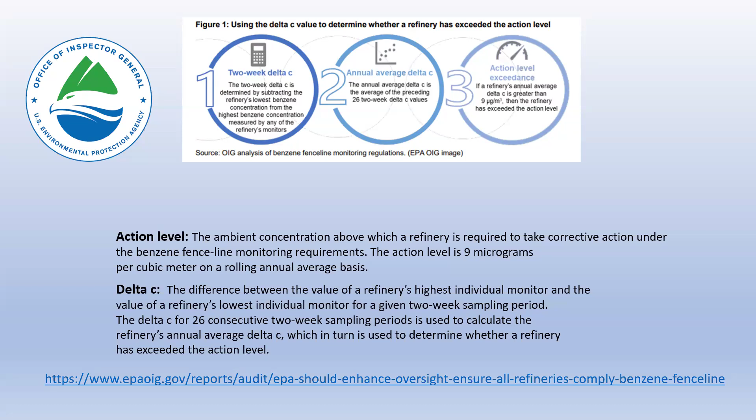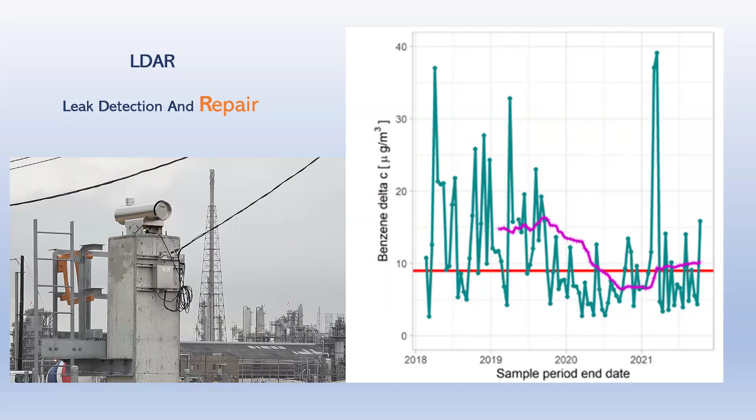So what this graph shows is one single plant that was down below that red line, that 9 microgram level. So they dip below it, but over that 4-year period you can see how things change. They spend a good part of that period way above that line with some big spikes. That's the kind of information the EPA looks at, and the kind of thing that spawns a lot of this action we're seeing.

So why does that boss care so much? Because he's getting pressure too. Like I said, everybody's got a boss.

Back in 1982, just a little background, I live south of Texas Avenue in Texas City. They try to make that a green zone, but there's still some homes back there. So a few blocks away was the Amoco refinery. And at 22 years old, I guess you could say I was in that 54% poverty level. And yeah, it did smell pretty bad.

But I got used to it. I worked offshore, so I got a good dose of clean air all the time. Came back, and after a couple of days couldn't smell anything. But in reality, most of the people on this webinar spend at least 40 hours a week in this kind of environment, in that refinery chemical plant kind of environment. So it's where we work, it's what we do. So each one of us cares, and we should, about emission leaks.

But back to the EPA - remember, they're from the government and they're here to help. The EPA has a free publication to guide you through your LDAR best practices. I was able to read it a couple days ago, and it's very complete. They pretty much lay out the whole model LDAR program.

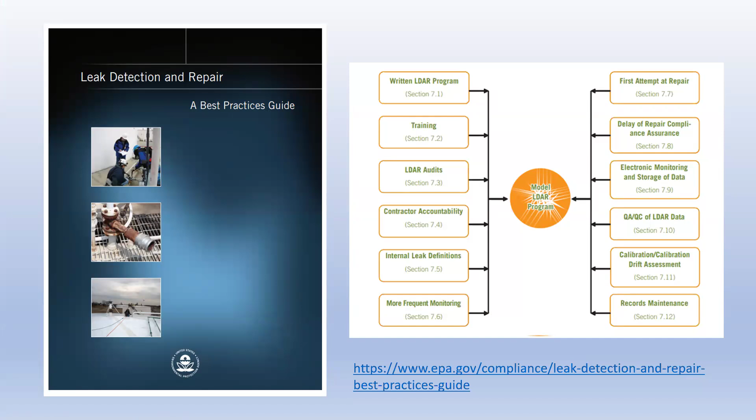And in my world, before the Belzona world, it was a while back, but what we really thought about with emission leaks was a lot of tightening valves and things. It was a lot of fittings, but we're going to see that there's a lot more to that.

And really a common theme with the EPA is time - how much time you have to report, how much time you have to repair. Another common theme is going to be money, so money in the way of fines. You'll see that that's coming too.

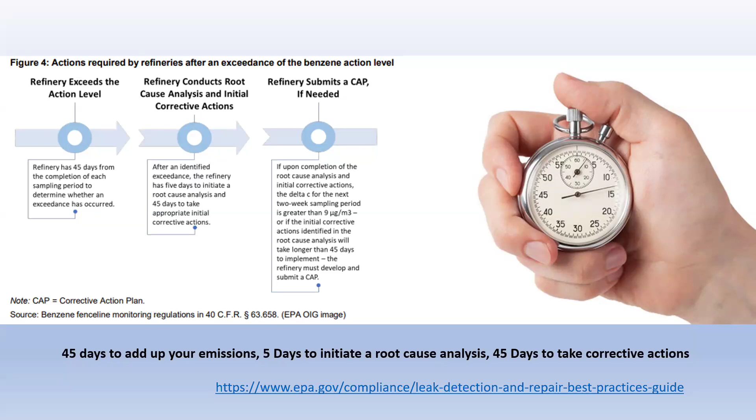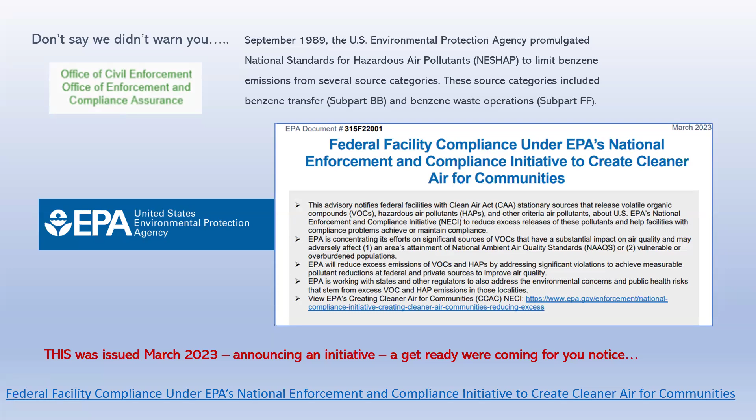So how do you respond when the boss is upset? When you know he's working on that report that makes you look bad, you get out in front of it. So you remind everyone that the law has been on the books for a long time. And then you announce an action enforcement alert.

So basically what you've done is you've shot a round across the bow and told everybody you're on the way. So that's what the enforcement alert looks like. I've seen it on the desks of you EHS guys, so I know it's something everybody's paying attention to.

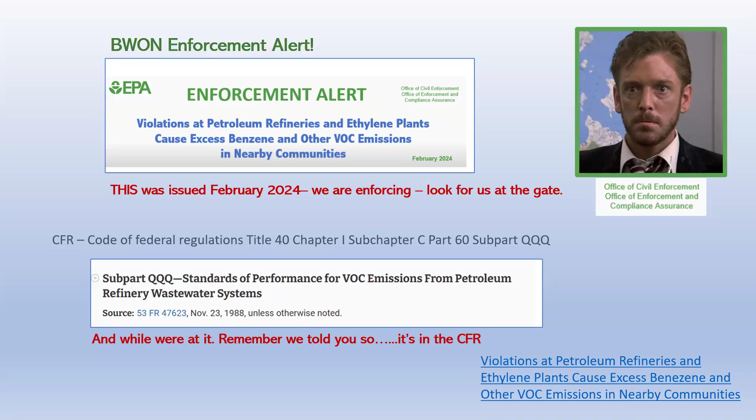Of course, they told you so, because they've had emission standards for refineries and air, and then their wastewater systems going way back to the late 1980s. So they're going to be carrying the CFR 40 in their hands when they show up, saying this has been on the books a long time. We're just here trying to make sure everybody's doing things right. And there's Mr. Peck making sure it's going to happen.

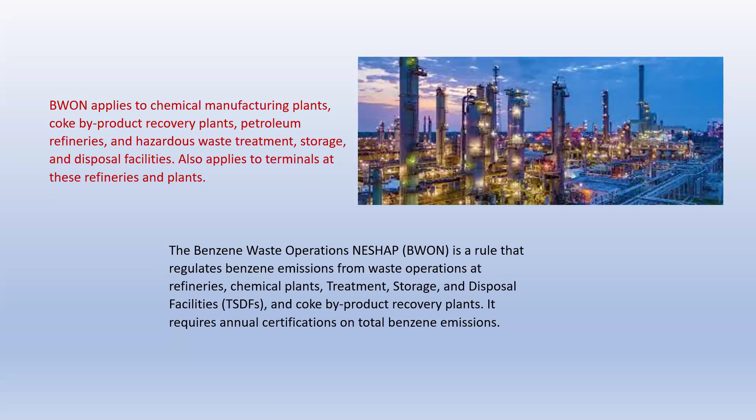So next, what you do is you cast a real wide net. It's not just a refinery. Let's look at the terminals within those refineries as well. Let's get all those tanks, all that flare lines, let's get everything. Then you look at ethylene plants, chemical plants, coke byproduct recovery plants, and then all of the waste treatment facilities that dispose of benzene for all these plants as well. So a nice wide net, a lot of people to talk to, a lot of people to find, if that's the case.

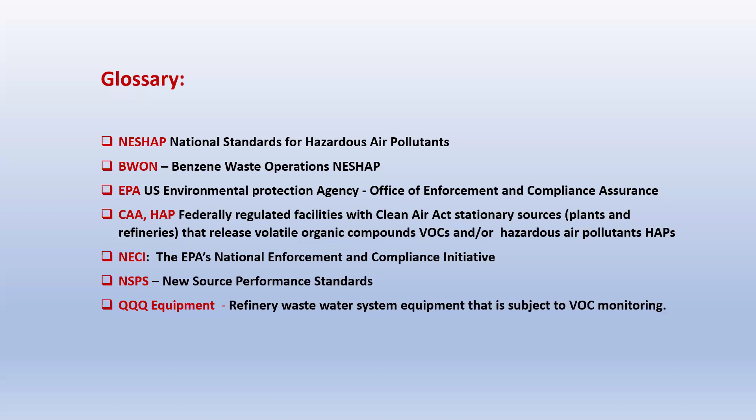So BWON, what is BWON? I put this little glossary together. I think we all know what the EPA is, but BWON is actually Benzene Waste Operations NESHAP, or NESHAP, which is National Standards for Hazardous Air Pollutants. So if people ask you what that is, it's BWON - I just say benzene waste management. And QQQ equipment, I threw that down there at the bottom, because refinery wastewater systems equipment is subject to VOC monitoring, and that is considered QQQ equipment. So those are all things you might hear when somebody's looking at emissions.

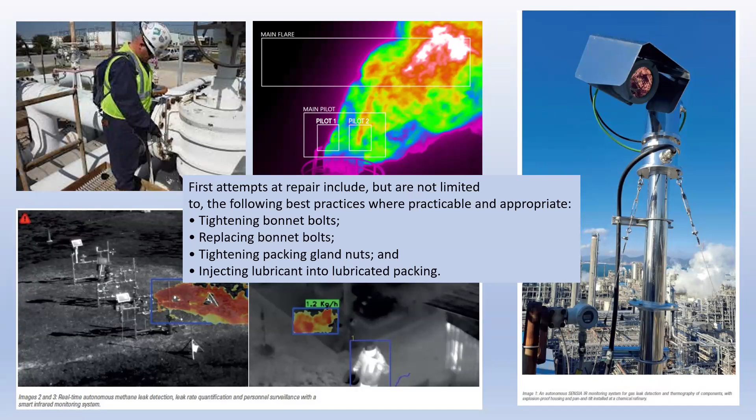As I mentioned, the first repairs everybody's going to look at is, hey, let's tighten up the bonnets, let's replace bolts, let's get new gaskets in place, let's take care of those valves, those pumps, those flanges. And the EPA, in that document I showed you earlier, actually points that out - they tell you how to do that. There's a lot of people in the world, a lot of gasket manufacturers out there that do this, a lot of LDAR - leak detection and repair - people ready to tighten that equipment up for you on the repair side of LDAR.

But it also, as we mentioned, includes the sewer systems. I don't think too many people have a clue on how to seal up leaks in sewer systems - that's what we've found anyway. We've seen a lot of attempts with different products that weren't really meant to bond to concrete and steel at the same time, or don't have the flexibility to hold up. Certainly, you don't see any guidelines from the EPA on how to do it - they just say you have to do it. So all of those hard to seal components on the wastewater side, those flexible floating roofs, the flare piping, all the stuff that's really tough to fix.

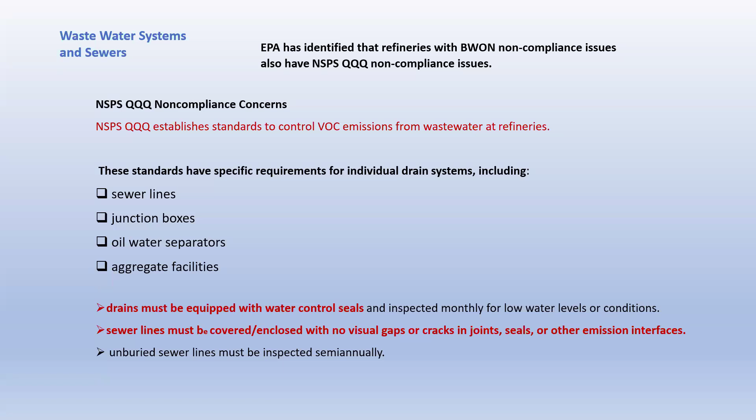That's kind of where Belzona comes in. We come in a lot of times when it's things that people don't know how to fix, so they call us - do know that it's on their radar.

So if you look at how this enforcement alert really caught the eye of a lot of the refinery executives and a lot of the EHS folks, it was when the fines started coming down. Up in Whiting, Indiana, BP has a refinery - it's the oldest one in the United States anyway, actually goes back into the late 1800s. And God knows their sewer system - I'm sure you can update equipment all the time above ground, but do you really go down and replace your sewer system a whole lot? Probably not. So obviously things have been leaking in there for many, many years.

And what the EPA did was assess them a $25 million fine, $25.1 million to be somewhat exact - that was just the money that went back to the United States. Another $6.3 million went to the state of Indiana. So that sounds like a lot of money right out of the box, over $30 million. But they also targeted the repairs there - they said here's what you have, a certain amount of time to get all these repairs done. And that adds up to about $200 million in monitoring and repair upgrades. So BP is on the hook for $240 million or so from this first visit.

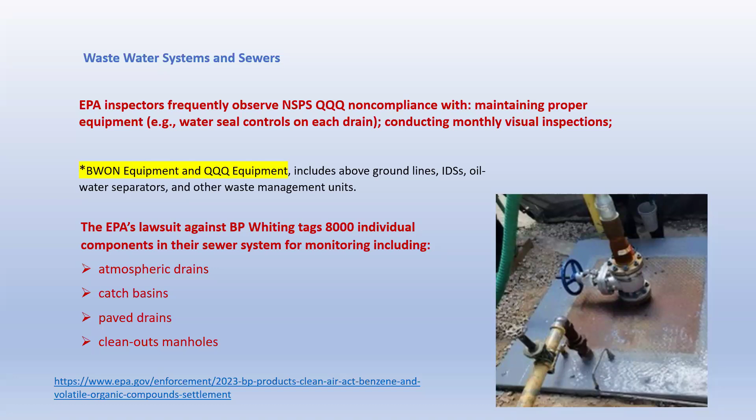Fines are assessed by the day in some cases, per equipment, per day. So that can add up really quick. If you look at their sewer system, you're looking at 8,000 individual components that they identified within that refinery.

8,000 of them. The last guy I spoke with down here on the Gulf Coast about BWON said the scuttlebutt is that the EPA ran out of their budget, because we all thought they'd be down here around October, beginning of October, neck deep in them. But we think they ran out of money, and we think they're coming down probably in a couple weeks. So first part of 2025.

They obviously just got a big $25 million boost to their budget, so they've got the money to spend on some hotel rooms and some agents to come down and sniff around, so to speak. So we think that's coming. Smart people are getting out in front of that, and even smarter people are getting us involved, because we can take care of this kind of stuff for you. Maybe not every single little bonnet leak you're going to put Belzona on, but certainly the tough stuff, what we do best, we're ready to help you with that.

So we're going to explore some of those solutions here a little bit. First, I want to tell you how we're set up. What we consider our clients, we consider those to be technical partners with Belzona, meaning we're extremely involved, very hands-on.

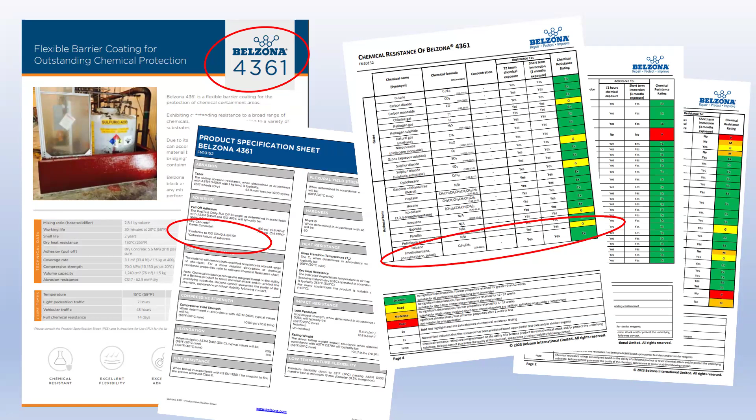Because let's face it, inside of a lot of these sewers, inside of a lot of the flare systems that we see, certainly a lot of the tanks that we patch, there's a lot more in there than just benzene. So it could be multiple waste products or processed products.

So from there it goes. Either he puts his other engineering hat on or he passes it over to our mechanical engineering division, and we write up a job scope which points out all the different materials that are used. This one you'll see has a number of different materials besides just the 1111 and the 4361. So it has your primers, it has your reinforcement, and it has some emergency leak stop products too, in case there's active flow or active emissions.

We also concentrate on the surface cleanliness, in this case CSP 3 to 5, and then you're going to get a written procedure. So the written procedure comes with pictures. We've found, especially having our own contracting arm here, that it's so good for our guys. It's certainly good for any contractor to be able to visualize what he's going to do. So we put together pictures in our procedures. We lay out every single step, and then we also lay out the inspection criteria.

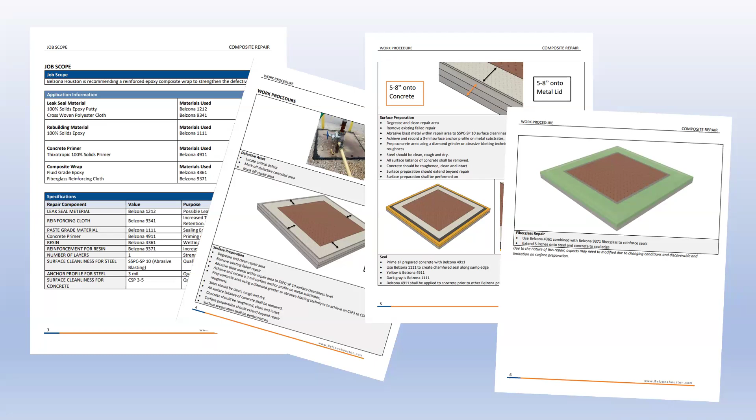So this is good for you to have in your hand too. So when you get this package from us, George would have this in his hand. Your guys would have this in your hand, and you are able to oversee and make sure that the contractor is following all these steps as well.

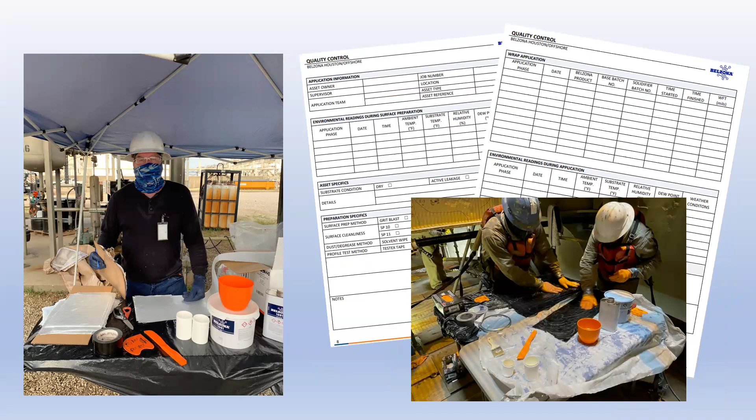Then, of course, you're going to get some QA/QC documents in the end. There's an example of QA/QC documents that come along with the package. So that's something that can go in your file where you have documentation of the actual repair.

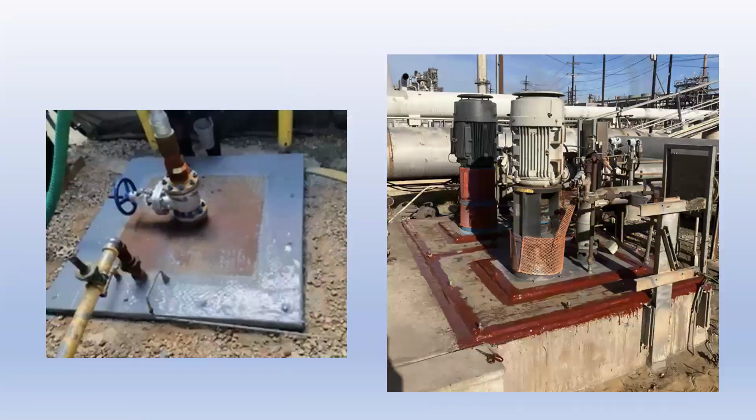The other thing that you're going to see in a lot of these applications is that some of them are the same, but there's a lot of different types of applications there. Some of them are easier than others, some are tougher than others. This is fairly simple on a wastewater treatment system. These get sniffed and they get marked off the BWON leaking components list. But when you get into some of these tank leaks, you really need some experts doing those.

So BHI Coatings, that's all we do is put on Belzona. We're a 24/7 full service provider for everything Belzona. We maintain relationships with other contractors, though. I just talked to a tank repair contractor today about a floating roof application. So we're working with those guys as well. We're coming up with custom solutions for a lot of these tough areas.

In that case, one of the legs up there had a crack around the weld plate at a refinery trying to catch up with all this. So people were working on this stuff every single day. So we've seen a lot of it.

So if you look at the EPA, back to those guys again, they're from the government, they're here to help. You've got 15 days to make your first attempt repair on a fixed roof tank. You may not even have a way to get up there yet. So if you are inspecting it, somebody's gone up there and sniffed it, so you've got a way to do that. But can you get a whole crew up there, especially on these floating roofs? So 30 days to get it completed. You have 15 days to start and then another 30 days to get the whole thing done. And that's on a fixed roof.

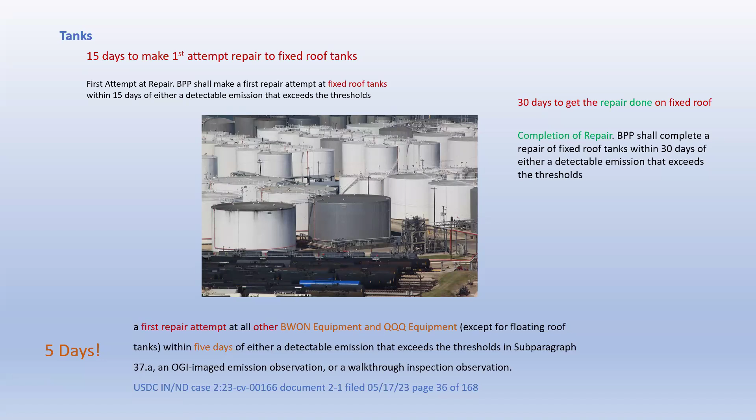You look at some of the QQQ equipment, not the floating roof stuff, but all these other things, you may only have 5 days after you sniff it to get something done about it. 5 days. So you need a lot of resources. You need a lot of help to be able to avoid those fines and be able to get in there and do things not only correctly, but quickly.

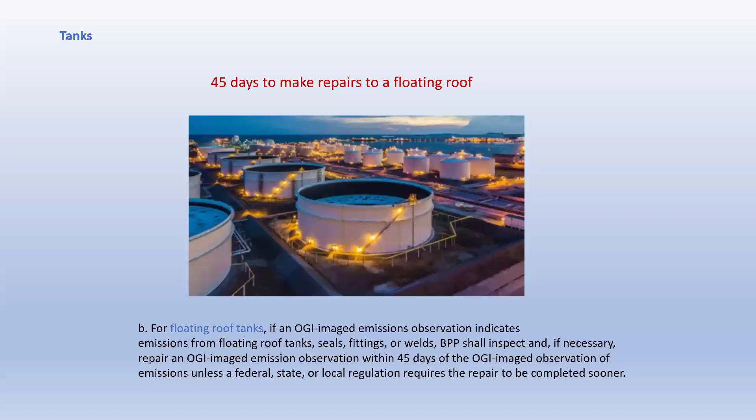Why do they give you a little bit longer on floating roofs, 45 days? Because they are not easy, they're not easy to get to, they're not easy to repair. Lots of times you've got to drop product down to reduce flows, especially on active leaks. So you really need a technical partner that has not only the experience, but all the resources and the products to do it right, and do it right the first time. So we've been tackling floating roof leaks for a while, and we used to do them one way.

We do them a little different now. We really get after it. We fix them in a number of ways and use a number of products on them because they are tough and they're hard to prep those areas too.

By far the star of this, our favorite application, our specification for floating roofs is Belzona 7311, which is a fatigue-resistant structural adhesive. Probably the toughest or most tested Belzona that's ever been on the market. It's been out several years now.

So this is what we use to bond on stairs on a tank or bond on handrails offshore. We use this. It's proven to be as strong as a weld. It has a cycle test.

It's actually a cycle to failure versus strain amplitude test where we cycled it 1 million cycles at 63.1% with an alternating stress amplitude of plus or minus 2.526 megapascals.

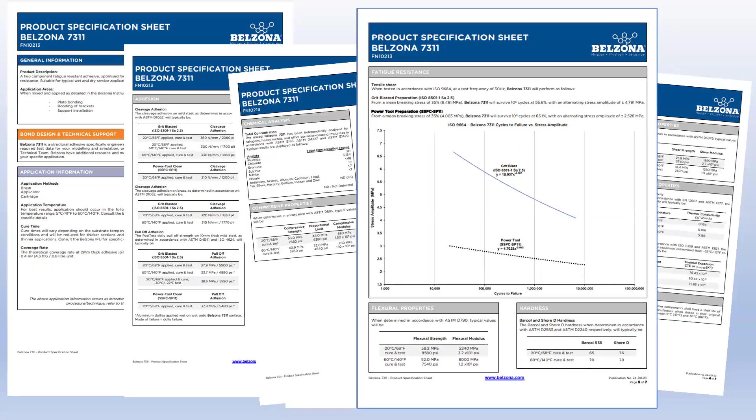So you're looking at something that has been tested where you can take that information, plug it into a finite element analysis program, and satisfy the requirements to be able to use it in some of these very high risk applications. But of course, sealing a floating roof on a petroleum tank is pretty nasty work.

So you'll see multiple products in this repair, on the second page in it talks about 9611 and 1212. Those are some of our super rapid surface tolerant epoxies, so they can work in the presence of oil and with very little prep just to get everything stopped. Then after you get the leak sealed, you can come in and do the prep required to get some of these higher, more advanced products in place.

We're also using reinforcement and making much larger repairs. We're kind of trying to tie a lot of stuff together. So we're not just going in where you've got a 1 inch hole and making a 2 inch patch. We're reinforcing the entire area and making sure it's done properly.

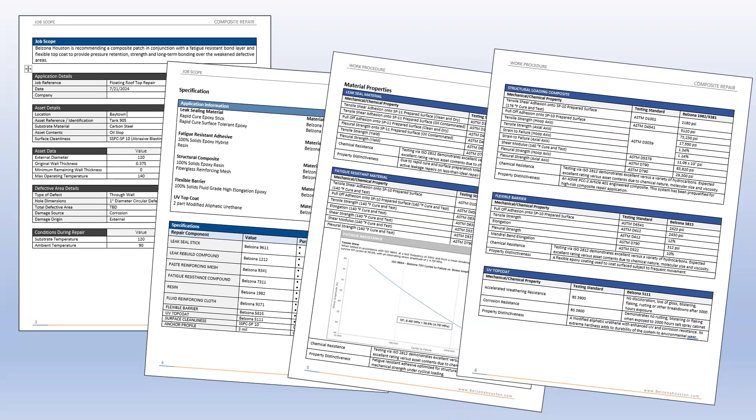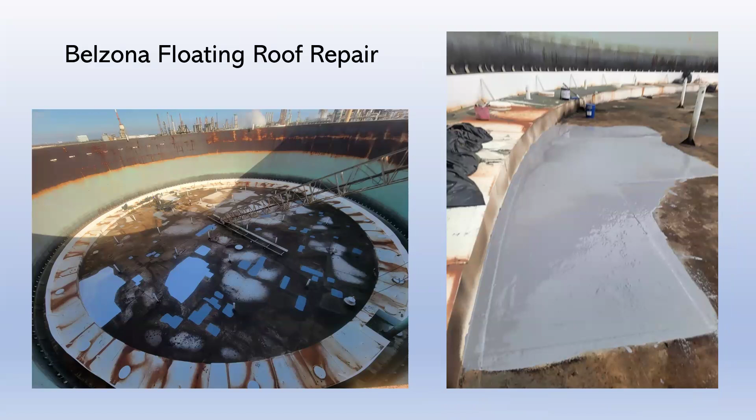Here's your step-by-step pictures of that application for your contractor, and there's some finished photographs of the repair of some really bad leaking areas on a floating roof, all within the target time.

Same thing—it has that long-term repair quality and has that consistency to be able to flex with the movement, not only from the environment but also from all the people that go up there to inspect, walking on it, making it pop and move.

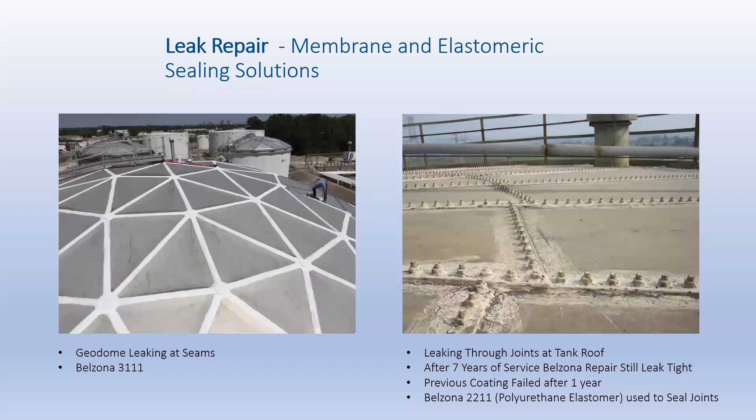We did talk about flare systems a little bit. As you know, the flare system, I look at that like the intestines of a plant—it runs everywhere. It takes waste away. Sometimes whatever you fed it is just sitting there at the bottom of the pipe, cooking away, creating gases, doing what happens in your intestines.

But the pipe can't hold up to a lot of that stuff, so it's eating away the internal wall thickness of that pipe from the inside. We make these repairs sometimes in a big way, sometimes just localized.

What's that all about? You may have seen it at an earlier webinar, but basically the product is pre-qualified using testing in accordance with PCC2, which is a post-construction guide. It basically tells you everything about how to weld a patch on, how to fix stuff. It has an entire section, 401 and 402, two sections, for the repair of pipe, for long-term repair of pipe.

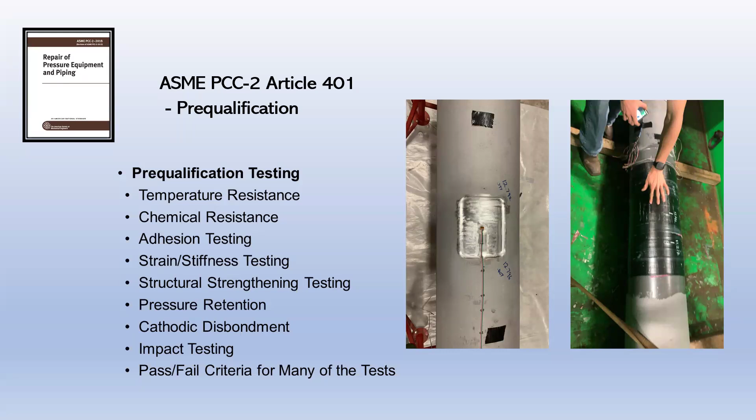So it goes through a bunch of testing. This is some testing that we did here in the lab in Houston for the Super Wrap product. And then the nice thing about it is that it fulfills the requirements of API 570 for piping, API 510 for pressure vessels, and API 653. So when we get into some of these storage tanks, we can do an engineered repair with a designated lifetime.

A full package is always going to come with a Super Wrap 2 repair because we're running those calculations that are laid out in ASME PCC2, plugging the testing data from the material in there, plugging your operating conditions into those formulas, and coming out with the equations that tell us how long and how thick we need to make the repair. It also helps us with selecting the right products as well.

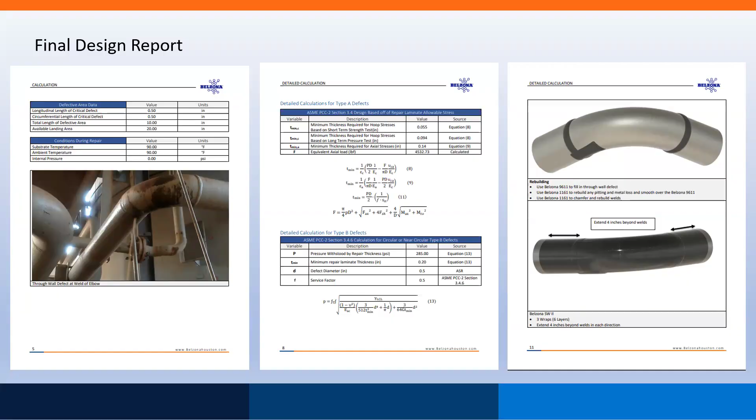So we have various different materials that are qualified. And who's putting it on? Somebody has to be qualified to put it on. With this particular product, you go through a full day course here at our location in Alvin, Texas. It's a fairly intense course, so it covers a lot of the leak sealing products and procedures that we've seen before, the plate bonding and the plugging. And then it also has the full composites class for the Super Wrap 2, the carbon fiber material. So somebody has to have that cert to be able to do these installations.

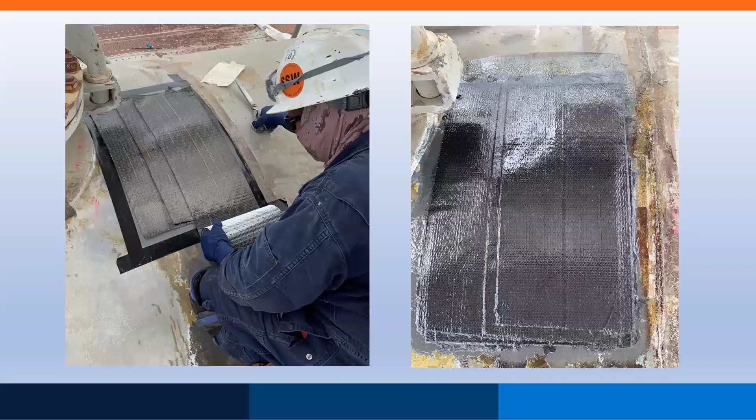We also have contractors throughout our territory that we've trained in this, and offshore, to do these Super Wrap 2 applications. So what's that mean for you? Not only that you can get it done, but that you can also get the paperwork and a certification so that you can put that in your MOC paperwork. So now you have a design life, you have what we consider to be a long-term repair. So everything that you need.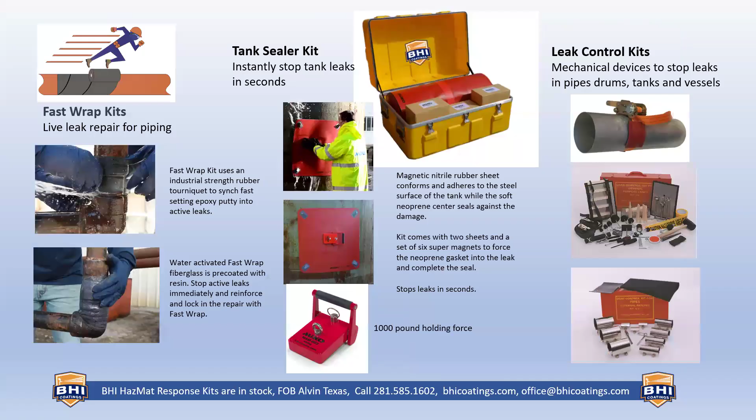We also realize, especially with our contracting service, we run into a lot of stuff and we need help sometimes beyond just the Belzona toolbox. So we have assembled a lot of emergency response type products for leak control. So not really cleaning up spills - that's somebody else's game. What we're doing is trying to stop active leaks.

So through our contracting arm, what we decided was let's let the world have these products too that we've used so successfully. So you can contact us. We can set up a training for you. We can supply these materials that can stop active leaks. And then once you get everything plugged up, patched up, that's when you can come in with the Belzona and make a more long-term type repair.

So the big thing is you do have to make long-term type repairs. That's each piece of BWON equipment that's modified to use temporary controls. So basically, if you plug it and patch it, they want a timeline. They want you to upgrade those temporary controls to permanent controls.

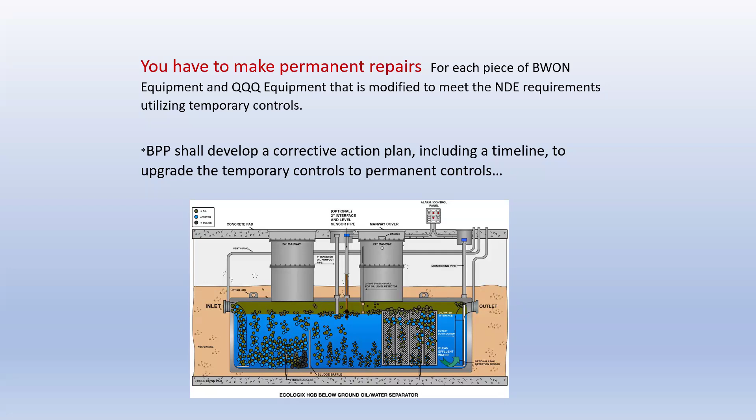So how do you do that? You do that with an engineered repair. You do that with documentation. You do that with paperwork that proves a lifespan of the upgrade that you've made, or that change to that equipment that you've made. So that's the resource that we have here for you through our engineering department, through our contractor OQ department, through our tracking of the applications and the QA/QC process - we have all of that documentation that shows that you've done what you need to do to get a good long-term repair because the fines rack up.

As I mentioned, daily fines. So $5,000 a day may not sound tough, but if you have 8,000 locations at $5,000 a day, that's a lot of money. So I've heard that magic number around was $45,000 a day. Well, that's just on one piece of equipment. So you can imagine if you're paying by the piece of equipment, what you have to do.

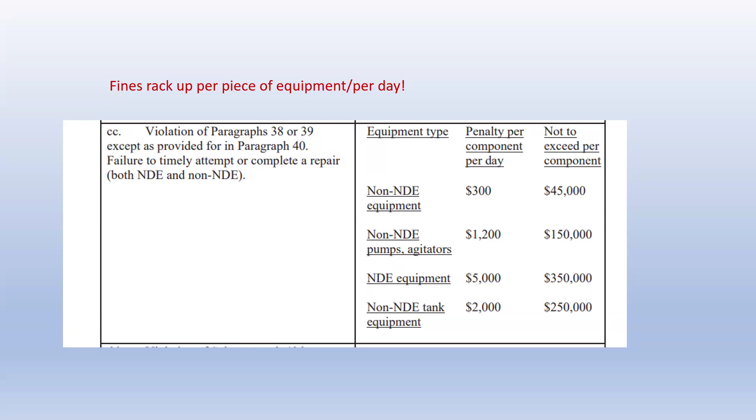And back to social justice - you think the fines are bad? No, BP had to pay another $5 million to replace older vehicles within the community. So basically, you're rolling out $5 million worth of electric school buses up there in Whiting, Indiana, as punishment for people breathing your benzene out of the air.

So, like I say, we all want to work in the nicest place that we can. We want to do our job to keep energy popping in this country. So, clean it up. Let us help you, and thank you for your time.